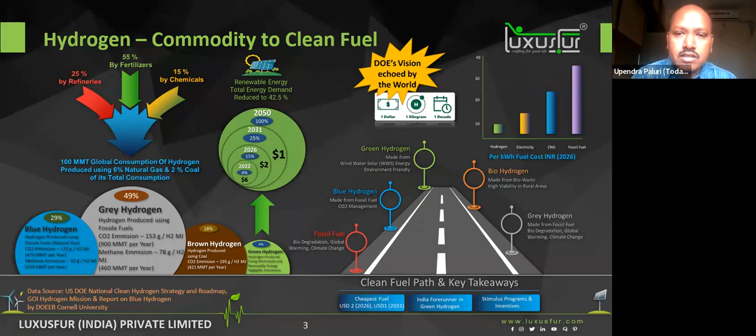So our... sorry. So we are not lagging behind this. So our vision, company's vision is that...

There are anthropogenic emissions, which is a widely accepted concern, because you can see a lot of global warming and environmental pollution. And if you can see the fog really in Delhi right now, you cannot breathe normal air in the month between October to December. So these are all due to emissions generated by human activities only. So we need to call for an urgent solution.

Now, urgent solution - we have to cure this problem as soon as possible. So for that reason, we are developing this company. Luxusfur was established by Pankaj Kumar, and in 2021, we wanted to develop this indigenous solution, research and development using futuristic technologies. In this, we want to work on core technologies in different areas using hydrogen fuel cell.

Hello? No, yeah. Yeah, you're able to hear, no?

Yeah, you're audible. Next 5 years, what is our focus - we want to, in the next 10 years, definitely become part of the hydrogen generation, distribution and all. But our next 5 years focus is on the consumption of hydrogen - once hydrogen is there, how it can be utilized.

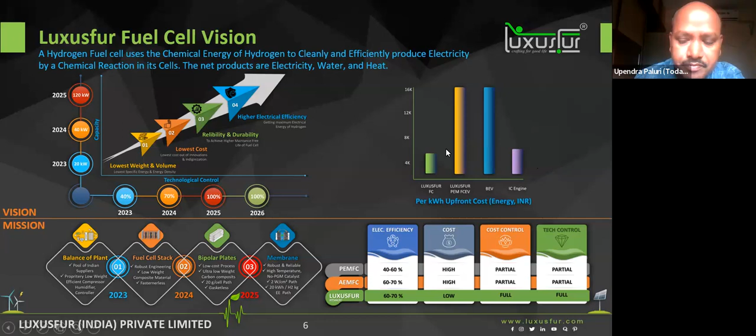So this is what we are doing. It's a common design for AEM and PEM cell, and we are developing a smart cooling system. For this, there are a lot of ECUs and control systems being developed. We are developing it, and this is the plan.

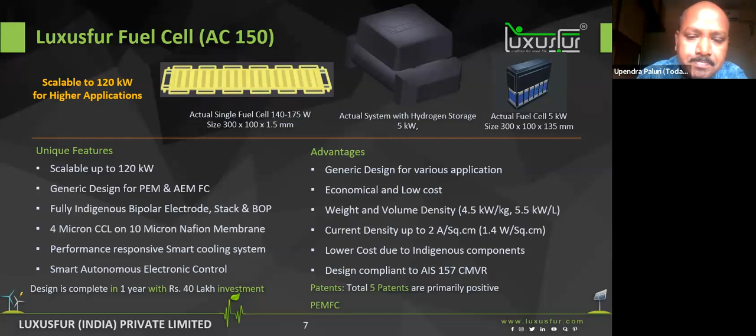So if you have a question, where are the applications we are targeting right now? For that, we are depending on availability of hydrogen and energy to power ratio, EPR. If it is more than one, these are all energy intense devices, like forklifts, tractors, drones, power genset applications, JCBs, and big tractors. For these, hydrogen can be available at captive centers.

A hydrogen plant can be set up at a warehouse for a forklift kind of thing. It has to be operated in closed premises, there should not be any noise and all. The hydrogen plant can be available at a captive center, and that hydrogen we can use for running forklifts, tractors, even drones, and power backup devices.

Presently it is around 330 to 400 rupees per kg, and with that we have considered 22 rupees per kilowatt as the hydrogen availability cost it will charge. Similarly, maybe $3 it will happen, if that is there, it will happen in 2025, around 18 rupees per kilowatt. Then we can move on to the bigger JCBs, cranes, and all, so it can move from small vehicles to bigger forklifts.

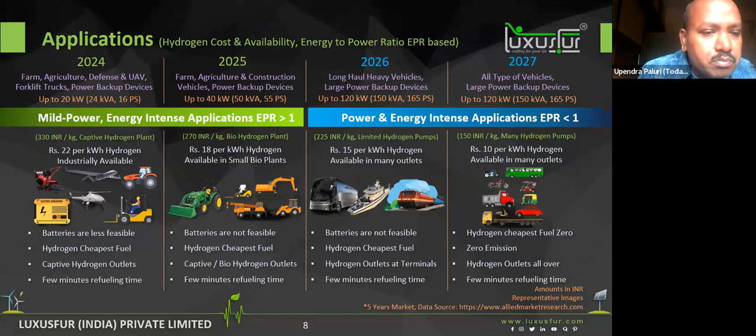So coming to drone, I'm focusing right now. Why, out of all these applications, have we focused right now on the drone application? Because drone is the most needy application, and the present power pack is having a lot of issues.

If you see the underwater defense vehicles, underwater and UAV drones, this is an immediate application. The present battery, LiPo battery and lithium battery, is having a limited cycle time. Suppose an agricultural drone is operating only on a LiPo battery, hardly 8 to 10 minutes, and the life of the battery is hardly 300 to 400 cycles. 300 cycles you can assume right now for this one.

So to cover 1 acre of land, a decent land area, every 10 minutes it has to come back for battery swapping. And continuously the farmer's drone is not getting operated, so there are a lot of failures because of limited cycles. The drone is not operable for more than 6 months maximum, 3 months.

If they are operating continuously, not more than 3 to 4 months are they able to operate continuously. So the productivity of the farmer, or the aggregator running this drone operation for pesticide spraying, is hampered actually. For that reason we have targeted this drone application initially.

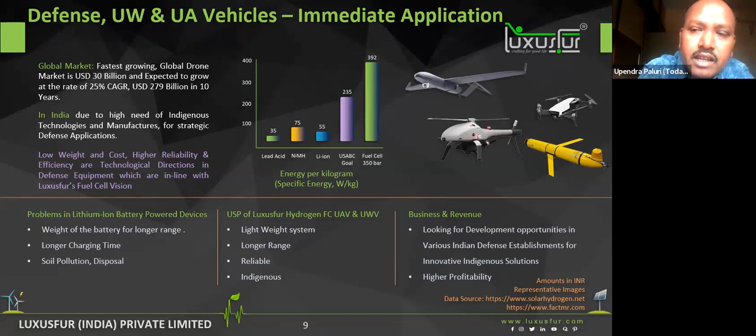And underwater also the same thing. Defense also is looking for a good solution where it can have a longer flight time, so that it can go deep into enemy territory and bombard the targets and come back. That is what even defense is looking for.

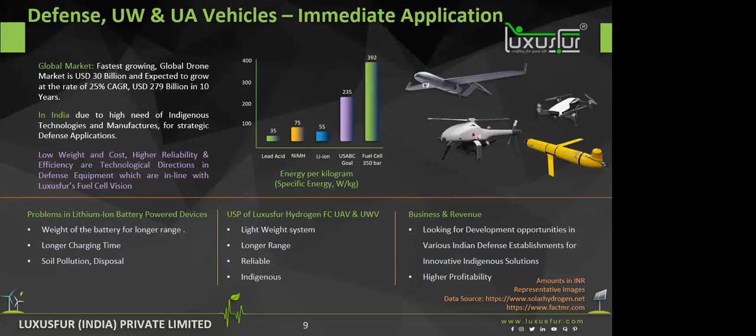And utility like firefighting equipment is there. Suppose at the 15th floor some urgent thing is to be sent. Now using a drone, we can extinguish the fire at the 15th floor by developing a small fire extinguisher, so that we can supply it there and spray it. We can extinguish the fire at the 15th floor using the drone. That is what is the target actually.

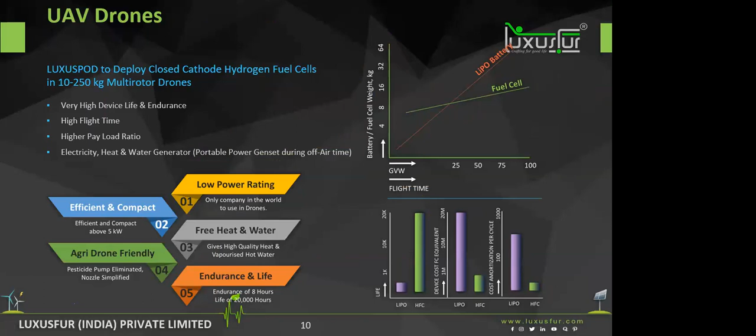We'll have that at the end. Yeah, that's fine. So this is complete with your part, I'll complete it. Yes, correct. So this is what is the UAV drone we have targeted, and I will show you the present status also, and then we can move forward.

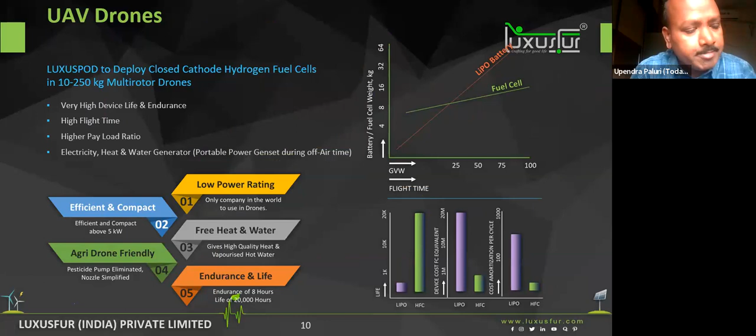Similarly, applications are tractors also. This fuel cell equipment can be used for small tractors and all the equipments like tillers, which can be converted into fuel cell operated. Once the hydrogen is available, we'll move towards that area.

We are also targeting genset applications right now. Suppose if you see a genset application running a mall, it is very bulky as well as noisy, and to run a mall it requires a very big genset, and the cost is very high. Over a period of time, we would like to replace it with our hydrogen fuel cell.

And also the pure water that comes out, which is in the form of distilled water, can be used for other purposes also, like heat and water.

Other application is forklift, where forklift is also a needy application, where it has to come now in the warehouse. The forklifts are to be operated silently. Presently, all the forklifts are converted into electric using lead acid battery right now. The problem is the operating lead acid batteries have to charge for 8 hours, and cool for 8 hours, and run for only one shift of 8 hours. So the productivity from the lead acid battery is only 8 hours.

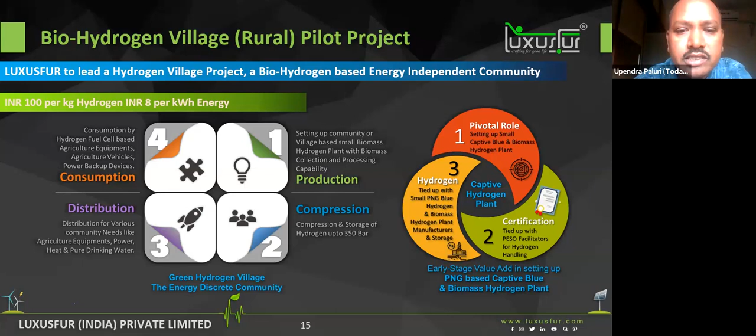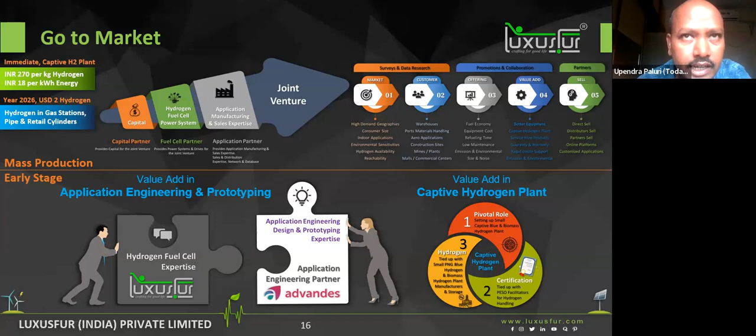Our go to market strategy is that we are collaborating with our application partner. Suppose a tractor is there, we will develop the fuel cell tractor, and our partner will do the vehicle engineering part, deploy it in a village, run it, and move forward. We are also tying up with different application partners, like tractor and forklift manufacturers. We're looking for different partners so that a JV can be formed and the product development cycle can be followed.

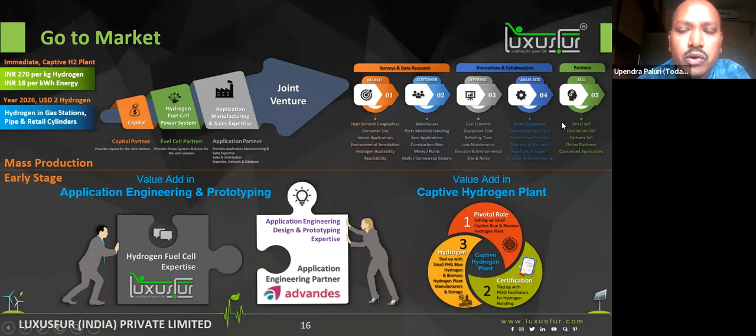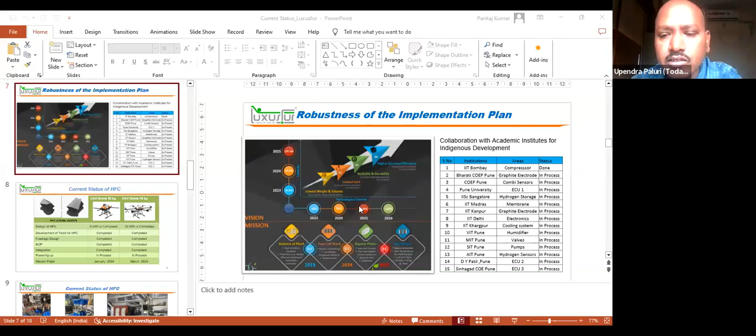Can you see the screen now? Okay, so this is what I explained. We have tied up with different institutes - IIT Bombay, Bharati, COEP, different areas we want to collaborate with. We are in the process of signing the MOU. With IIT Bombay it is done. COEP we met yesterday, and we are collaborating with sensors, and different areas like that.

And this is the drone I can show you. This is the drone packaged with the hydrogen fuel cell stack as well as cylinders, and it will look like this. This is the present 25 kg drone, and this is the 75 kg drone. The design activity is done and powering of the drone is in process. By January 24 we want to fly the first 25 kg drone, and in March 24 we would like to fly the 75 kg drone.

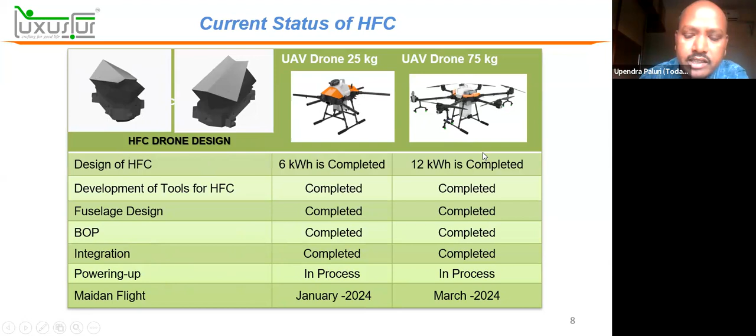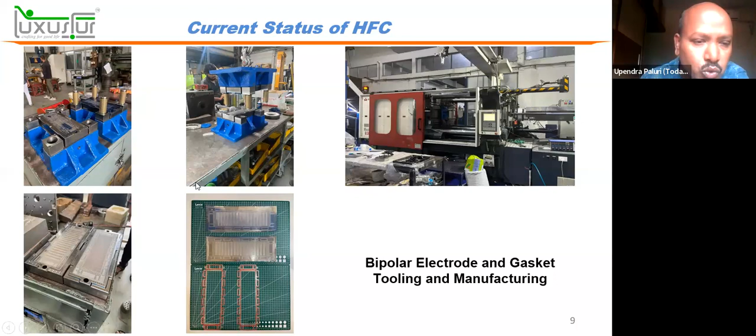So this is our lab. This is the bipolar tooling we have developed, and this is the stack. This is the bipolar plate, generated using an injection molding plant. This is the tool for the bipolar plate.

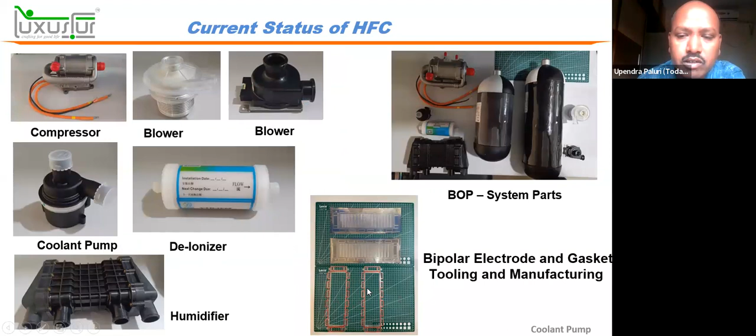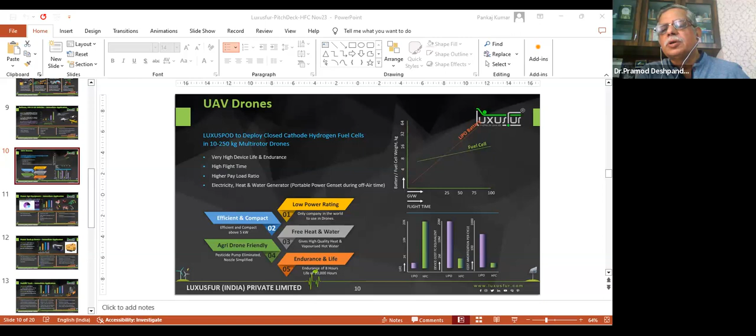Sir, basically anything related to CSIR, if it is CSMCRI, marine and salt chemicals, it is a CSIR laboratory, like NCL. They work on similar electrochemical aspects of chemical engineering. CSMCRI, marine chemicals is basically the target for them. Yeah, I know that institute.

Sir, actually I was interested in PEM fuel cell working. If you would like to visit and see that, is it possible? Yes, yes, of course it is possible, you're most welcome.

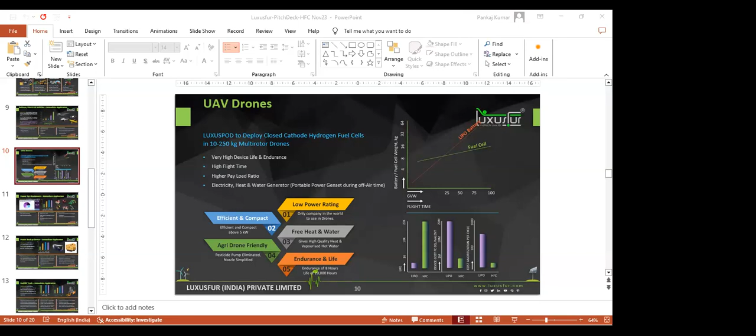By the third week of December, our drone assembly will be done, although the maiden flight is due in the month of January. So after the assembly, we'll be able to show you the complete operation of the fuel cell.

Sir, in Pune, where are you based? We are based in Pimple Nilakh. Pimple Nilakh, near Pashan? Yes, nearby. Thank you.